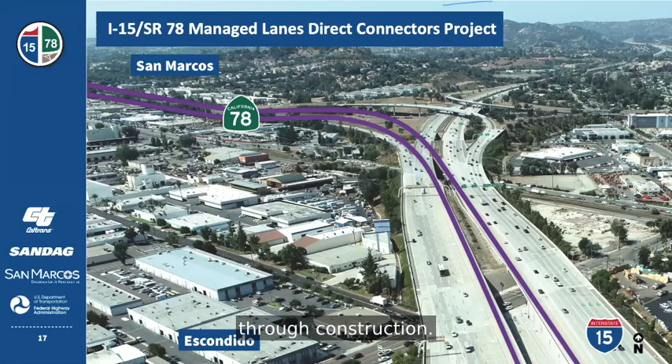This project, should a build alternative be selected, is anticipated to cost between $400 and $500 million through construction. The project is currently in the environmental review process. This phase is important in evaluating the potential environmental impacts, mitigation, and benefits of a project to ensure compliance with federal, state, and local environmental laws. The environmental review phase will also result in a preferred alternative. This project is funded through the design phase and could be ready for construction as early as 2025, should a build alternative be selected and funding for construction be identified.

This project's environmental document will consist of an environmental impact report as required by the California Environmental Quality Act, and an environmental assessment as required by the National Environmental Policy Act. These two laws, also known as CEQA and NEPA, establish protections of the environment as a national and state priority, mandating that the environmental impacts must be considered before any action or project is undertaken that could significantly affect the environment. This environmental document will showcase, assess, and present compliance with all other environmental laws, statutes, regulations, and considerations.

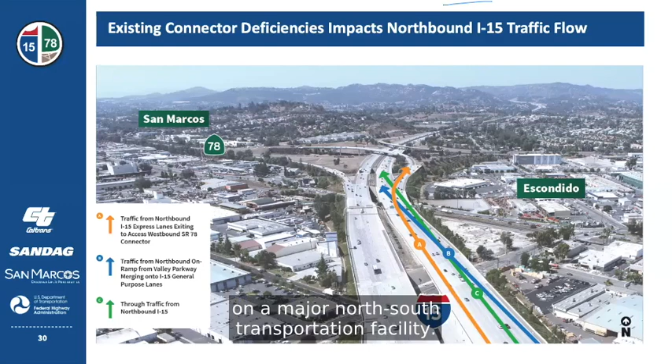On the southbound side, you have eastbound 78 traffic merging onto southbound 15, represented by the orange line. Then you have southbound 15 traffic either continuing south or trying to exit at Valley Parkway, which is represented by the blue line. These conflicts contribute to the backup not only on southbound 15, but also on eastbound 78.

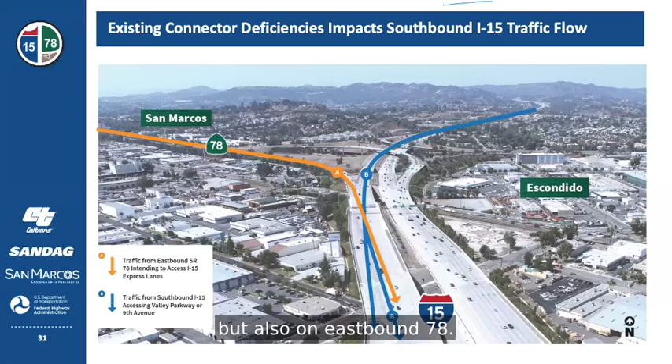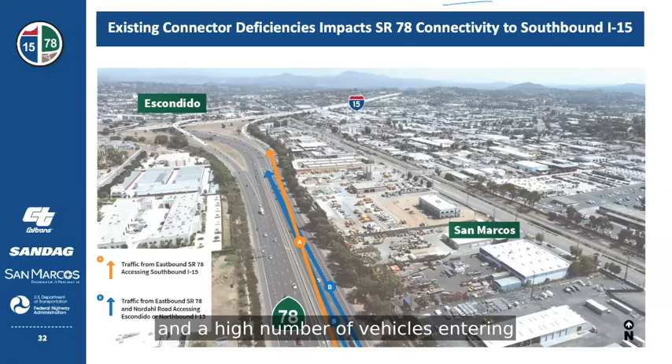In this aerial, we are facing toward the east, looking at the interchange. Eastbound 78 experiences a significant backup just before the connectors. In this situation, there is a substantial amount of volume seeking to merge onto southbound I-15. This is represented by the orange line. You also have through traffic heading eastbound on SR78 and a high number of vehicles entering from the Nordahl Road on-ramp, represented by the blue line.

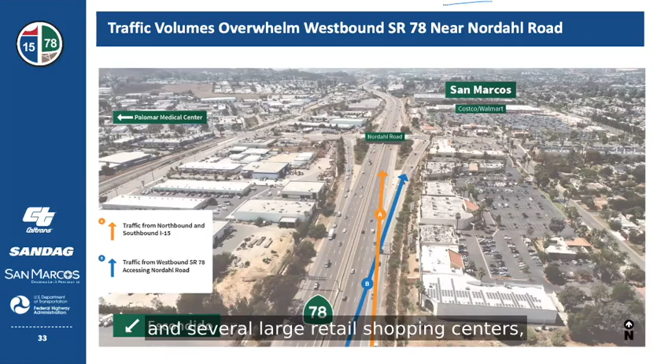Now we are facing the westbound direction along SR78, looking at Nordahl Road in this aerial. A substantial amount of traffic is entering westbound 78 at this location. This traffic comes from three sources: northbound 15, southbound 15, and downtown Escondido. This flow of traffic overwhelms this short stretch of SR78 and causes a backup that overflows onto northbound and southbound 15. Additionally, traffic trying to access Nordahl Road, which provides access to Palomar Medical Center and several large retail shopping centers, further contributes to the traffic challenges in this area.

As the slides begin to briefly touch upon how SR78 impacts access to and from local streets, I'd like to introduce Ed Dean, Deputy City Engineer for the City of San Marcos, to touch upon a few other traffic, connectivity, and access issues his city is experiencing in relation to SR78.

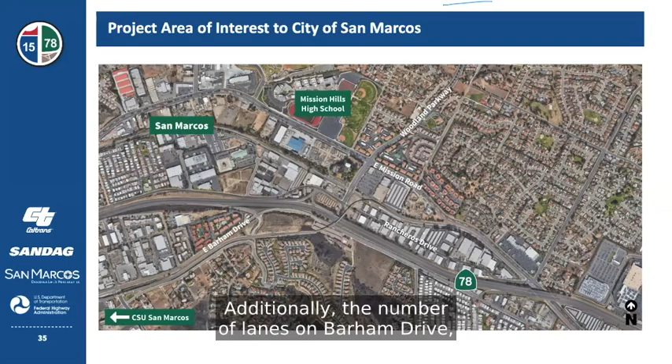Traffic patterns show that many people use Barham Drive to access State Route 78. Additionally, the number of lanes on Barham Drive shifts several times between CSU San Marcos and Woodland Parkway, further exacerbating the inefficiency of the road. Woodland Parkway under SR78 is also a pinch point separating the community. Traffic from Barham Drive uses Woodland Parkway to not only access westbound 78, but also residential and commercial destinations on the north side of the freeway. The lack of connectivity and access to the freeway between the north and south sides is a need that the city feels needs to be addressed.

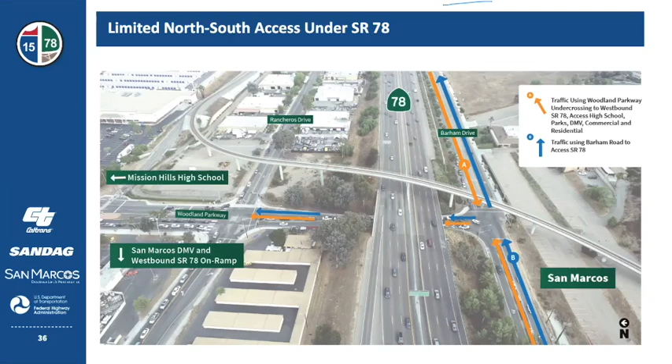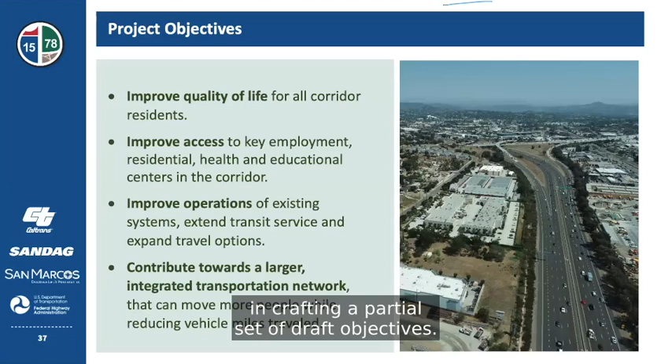Thank you, Ed. This review of the strain on the system helped the project development team in crafting a partial set of draft objectives. Ultimately, we want to build a project that supports multimodal access, moves more people, and can be managed to support future growth while reducing overall vehicle miles traveled through the corridor.

A purpose and need statement is one of the key elements to understanding why a project is needed and the potential solutions that can address that need. The project need is identified as the transportation deficiency or problem. The project purpose is the set of goals and objectives that will provide a solution to that problem. The goals and objectives help clarify other influencing factors to ensure that any considered alternative would be a good fit for the community and its users.

A purpose and need statement is the foundation of every transportation project, and a refined purpose and need statement will help the project development team develop a reasonable range of solutions to meet the needs and fulfill the project purpose. Now let's apply these concepts to the project.

Based on what the project development team has learned about the project area, the conceptual purpose of this project is to provide a reliable transportation option that reduces travel times, encourages multi-occupant vehicle usage, and helps reduce greenhouse gas emissions. The project's purpose would also improve access to key employment, residential, and health and educational centers in the corridor, while supporting state and regional transportation goals of improving person throughput and reducing vehicle miles traveled.

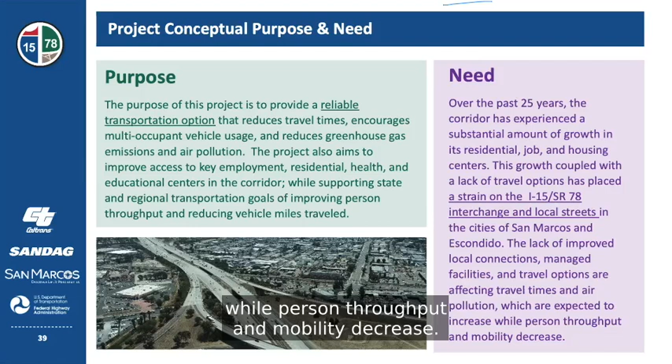Now let's get into the project description and review common features between the build alternatives. Please note, these common features are conceptual and may change based upon public feedback, budget constraints, and environmental and traffic studies. Before I jump into the descriptions of the common features, I want to explain what managed lanes are.

The term managed lanes has been referenced several times tonight already. Please watch the following animation. This short video helps to define managed lanes, what they are, how they work, and what are the benefits.

What are managed lanes? You've probably heard this term and other terms that sound similar and wondered what do these all mean? Managed lanes are a tool that help to reduce congestion by moving more people through a corridor at consistent travel speeds and with more reliable travel times.

That sounds great, but how do they do that? Managed lanes offer choice and flexibility. One strategy is to prioritize access to carpoolers, van poolers, or transit vehicles. These are often called high occupancy vehicles, or HOVs.

When space permits in the managed lanes, another strategy includes allowing solo drivers to pay a fee to use the lanes as a time savings alternative to the regular lanes. This is sometimes referred to as a priced express lane or a high occupancy toll lane. Solo drivers in San Diego are familiar with paying this type of fee through the FasTrak system.

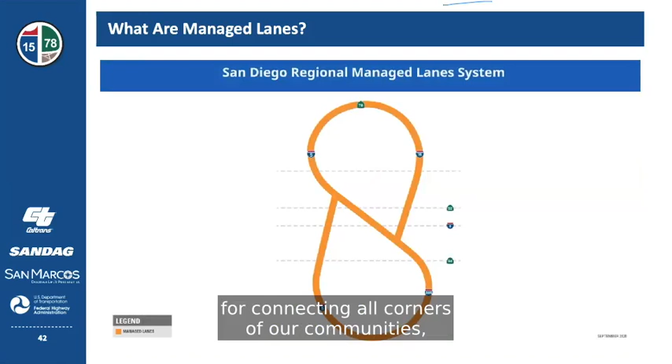A robust connected managed lane system is part of the regional and state vision for connecting all corners of our communities, reducing congestion, enhancing and providing choices for how people travel, and providing a reliable overall transportation network that makes it easier for everybody to get to the places that matter most.

Now that we have a definition for the managed lanes, I will go over the common features for all the build alternatives. One of the largest components of this project is the proposed addition of a new managed lanes direct connector between the I-15 express lanes and SR-78.

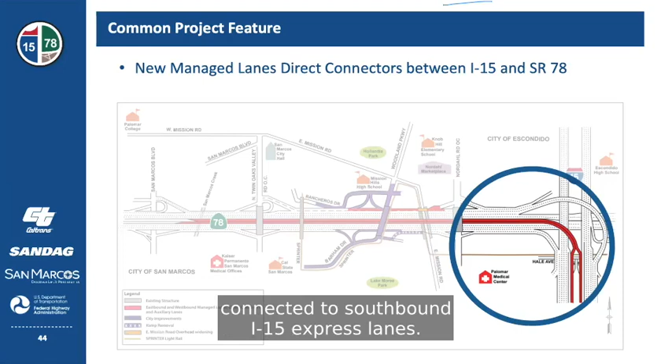There would be one new direct connector that would accommodate both directions of travel. The connector would accommodate northbound I-15 express lanes users wanting to connect to westbound SR-78, and eastbound SR-78 users connecting to southbound I-15 express lanes. The existing connectors would remain in their current configuration.

The new direct connector would connect to approximately 3 miles of new managed lanes on SR-78, constructing one lane in each direction between approximately the I-15/78 interchange and San Marcos Boulevard.

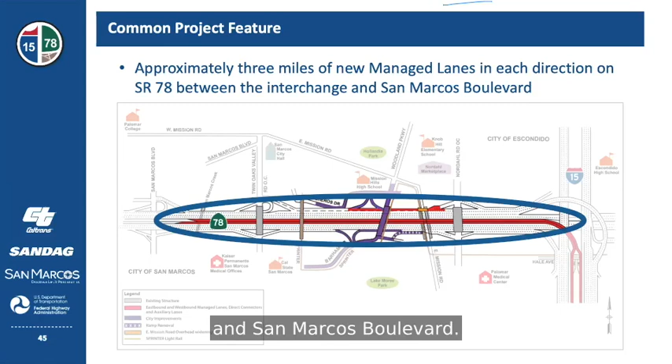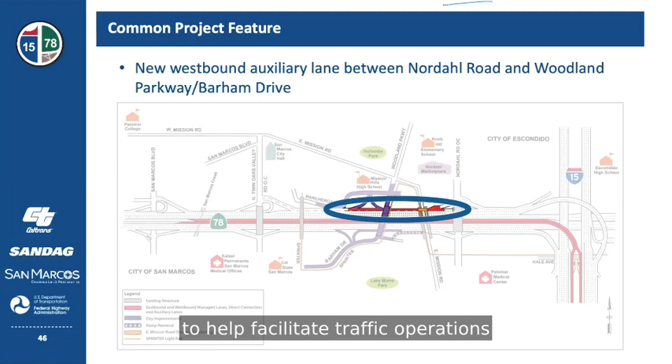An auxiliary lane is proposed between Nordahl Road and Woodland Parkway in the westbound direction. This common feature is suggested to help facilitate traffic operations and ease the strain of the high volume of traffic overwhelming the westbound 78 immediately west of the 15/78 interchange.

Depending on the final scope of this project, there is one design variation that would require the replacement of the highway bridge over San Marcos Creek. If the ultimate scope of the project were to include the extension of the managed lanes all the way to San Marcos Boulevard, the replacement of this bridge would be included to support the new managed lanes.

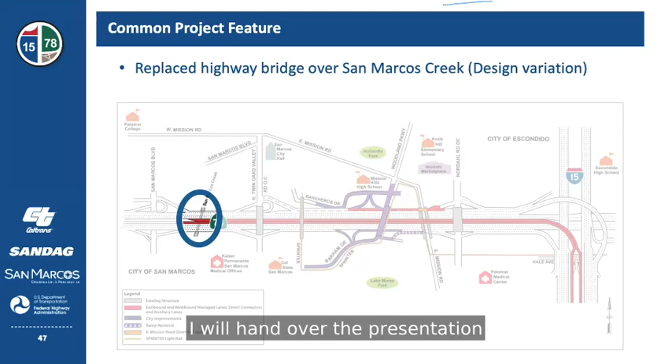For the last couple of slides, I will hand over the presentation to Ed Dean with the City of San Marcos once more.

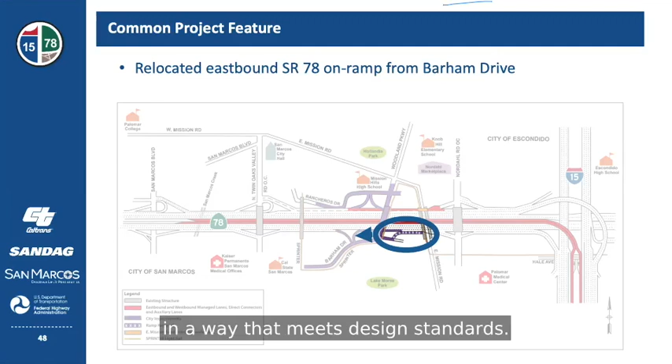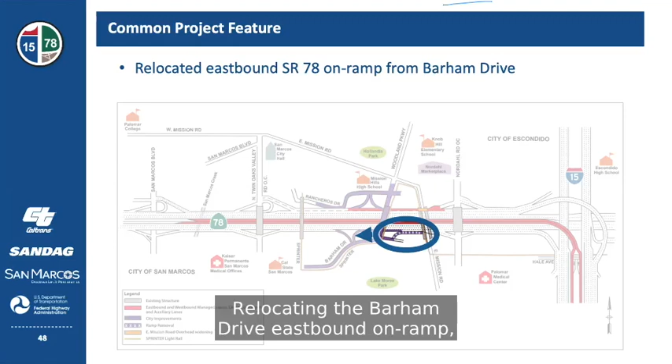Thank you, Kareem. One of the common features of any potential project build would include the relocation of the existing on-ramp to eastbound SR78 from Barham Drive. This on-ramp would need to be moved in order to accommodate a new managed lane in each direction of SR78. The existing on-ramp will not fit in the current location in a way that meets design standards. Additionally, growth near Barham Drive, west of Woodland Parkway, is expected to increase traffic using the on-ramp. Relocating the Barham Drive eastbound on-ramp further to the west would allow additional capacity on the ramp, increase the efficiency of the interchange, and better serve the existing and future travel demands.

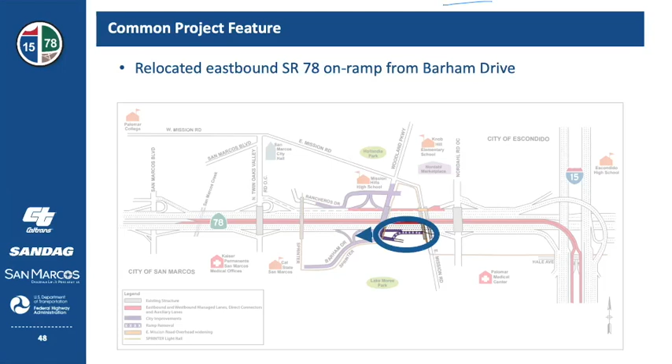Similar to Barham Drive on the south side of the road, a common feature of the project is proposed along Rancheros Drive near the westbound on and off ramps to and from Woodland Parkway. The on and off ramps on Rancheros Drive must also be adjusted and realigned to accommodate new managed lanes. Additionally, as populations that travel to and from our community are expected to grow, the proposed improvements to this on and off ramp would also create additional capacity on the ramp, increasing the efficiency of the interchange and better serving the existing and future travel demands.

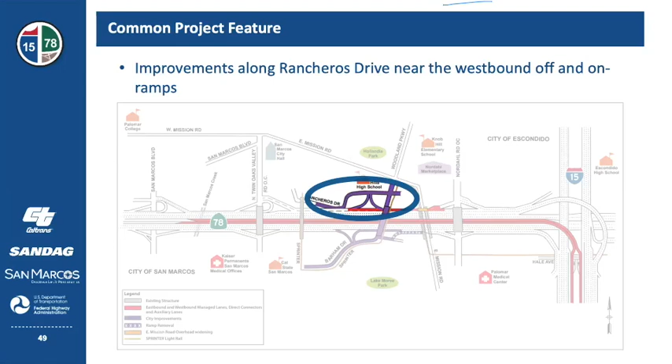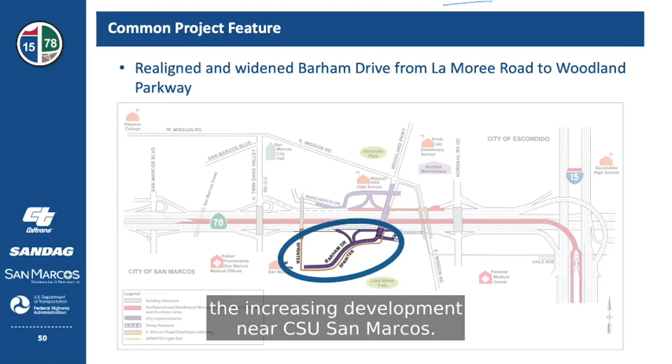Another proposed common feature is to realign and widen Barham Drive between La Moree Road and Woodland Parkway. This is a key route for freeway access to and from the increasing development near CSU San Marcos. Improving this road will increase access to one of our major economic centers.

One of the most exciting common features and opportunities of this project is the possibility of modifying or replacing the Woodland Parkway undercrossing should a build alternative be selected. Woodland Parkway is currently a bottleneck that separates our community north and south of the freeway. This project could improve the undercrossing and connect key residential and commercial areas north of the freeway to our growing education and employment centers south of the freeway.

Improving the undercrossing and Barham Drive would also allow the city and Caltrans to add a Class II bikeway between La Moree Road and Rancheros Drive. This new path could close a major gap in our local bike network, connect the university with the Inland Rail Trail bike path along the Sprinter line, and provide additional ways for our community members to move around town.

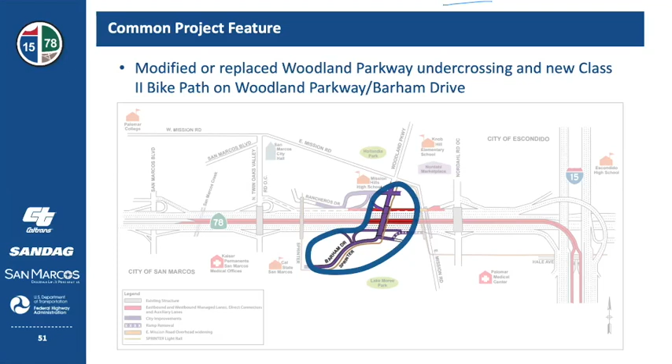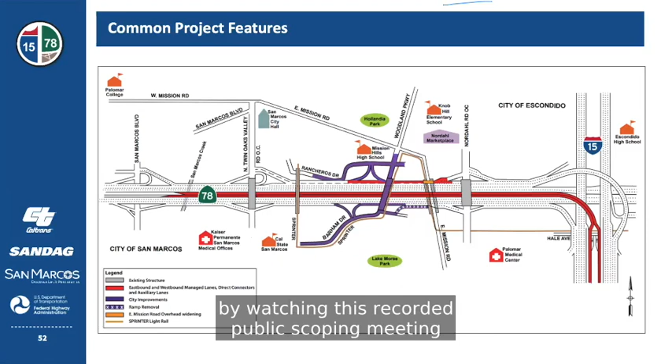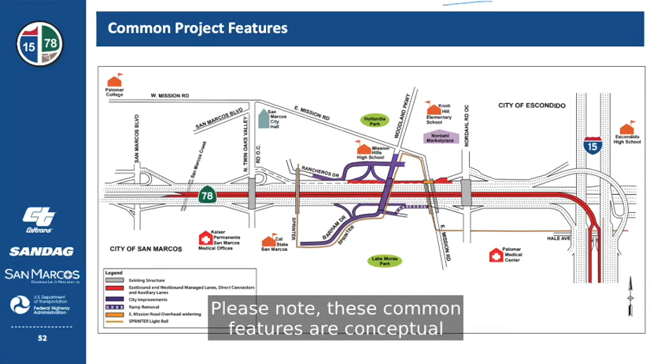Thanks, Ed. There are a lot of common features proposed in the project build alternatives. All this can be reviewed again by watching this recorded public scoping meeting or visiting keepsandiegomoving.com/SR78. Please note, these common features are conceptual and may change based upon public feedback, budget constraints, and environmental and traffic settings. Now that we've reviewed the common features, let's review the preliminary alternatives.

The main difference between the two build alternatives is that one would allow FasTrak users to utilize the new lanes, while the other one would not. The third alternative is the no build.

At the heart of the environmental process is how the conceptual purpose and need, proposed project, and preliminary alternatives are used in the context of environmental regulations, resources, and potential impacts that are requirements to adhere to, consider, and study. As shown previously, CEQA and NEPA are the two laws that promote informed decision-making to assist in the examination of the impacts and benefits of a potential project before deciding on an alternative to build.

The draft EIR-EA will present the assessment of numerous resources. The project development team will review the project area and pay close attention to the biological resources, community and social equity, cultural and historic properties, greenhouse gases and vehicle miles traveled, noise, and visual/landscape resources, among numerous other studies to ensure the proper assessment of the impacts and benefits of the proposed project.